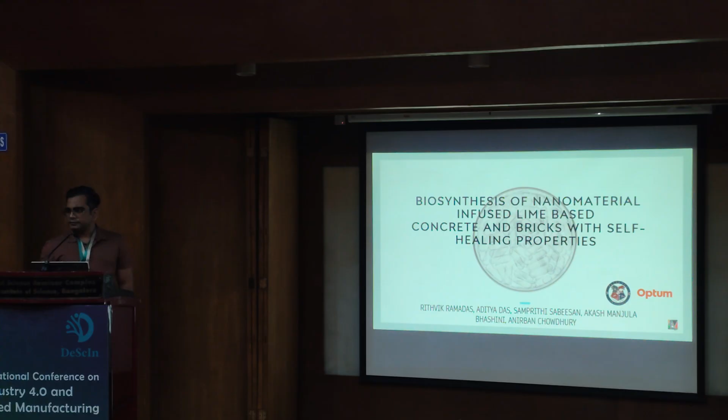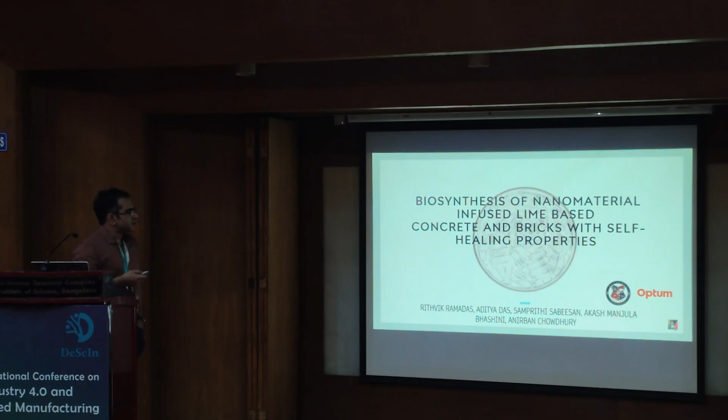So I'll try. A very good morning to one and all. My name is Rithvik. I'm a principal UX architect at Optum. And I'm also a visiting faculty at several places, including Alliance University. This is the work with my students there as well as my colleague there, Dr. Anirban Chowdhury. And the title of our research is Biosynthesis of Nanomaterial Infused Lime-Based Concrete and Bricks with Self-Healing Properties.

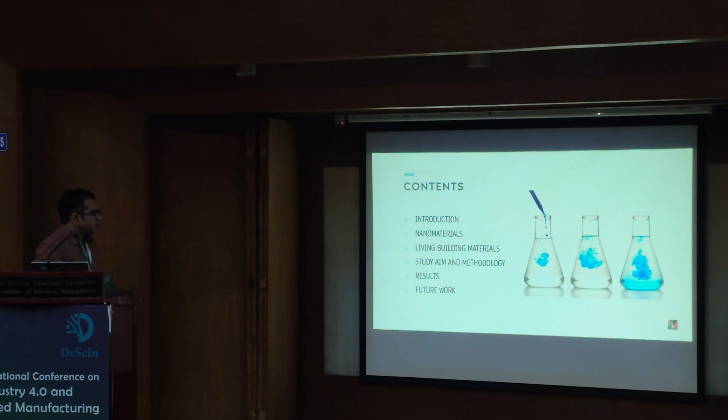This is the overview. We'll look at the introduction, we'll look at what is nanomaterials, we'll look at what is living building materials, what we try to do in this study, some results, and what we are trying to do in the future.

So nanomaterials have shown immense scope in improving properties and creating new kinds of materials, which are called metamaterials. What it does is, it changes the properties when you're assembling at a nano level. For example, there's the Ag9 silver nanocluster. Normal silver is non-magnetic, but the silver nanocluster becomes magnetic. So you have applications now in tagging cells using this nanocluster and extracting cells of interest. We'll look at other examples a little later.

In the right conditions, bacteria, viruses, and fungi are known to synthesize nanomaterials. Certain research papers consider bacteria, viruses, and fungi to be nanites or nanobots at that level. Although controlling them becomes a little difficult, we'll not cover that aspect in this paper. And buildings that are made with limestone are known to last a lifetime. Best example is the pyramids. They've hardly undergone much damage over the years except due to human interventions.

Roman concrete that incorporated limestone is known to heal itself. This was proven by researchers at MIT. And there are limestone microbes. So if you have gone to caves, you'll find structures that are known as stalactites and stalagmites. And there are species of bacteria and fungi and other microbes in it that help the growth of this by taking lime from the water that drips in the ceilings, as in calcium hydroxide that's present in the water in these places. And it also takes the carbon dioxide from the air.

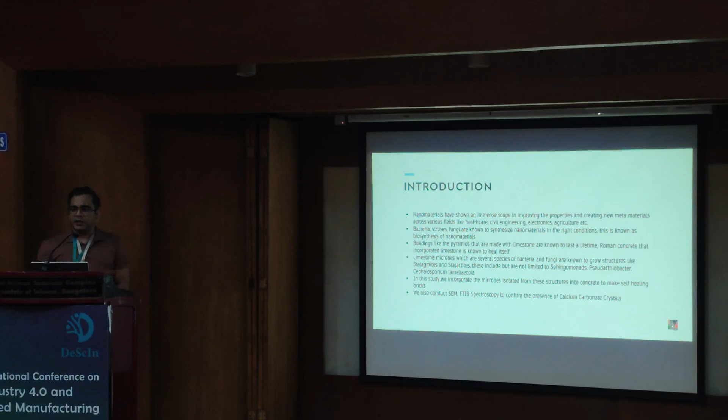We find similar structures in urban environments when accidentally sand from these places ends up in construction. So this bacteria ends up over here. In this study, we incorporated these sort of microbes into concrete and made it heal itself. We'll look at that. We also did scanning electron microscopy, FTIR, that is Fourier transform infrared spectroscopy, and X-ray diffraction to confirm the crystallization of calcium.

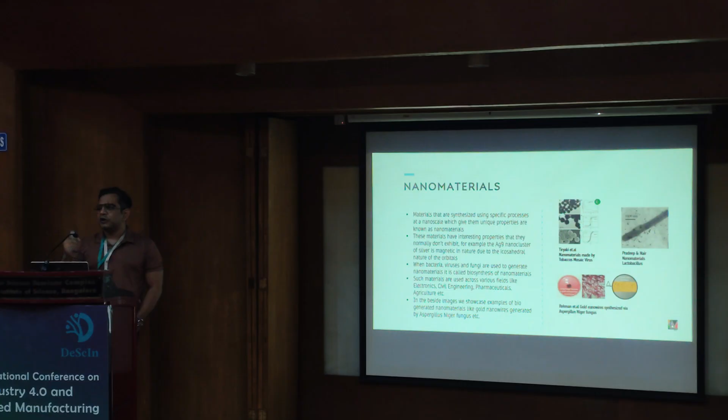You need to genetically modify them a little bit if you want to control their movements, or you can use something like an Ag9 nanocluster which has a peptide attached to it. Now, if you imagine that peptide is an antibody, it can attach itself to a virus or attach itself to a bacteria, and then you can control the movements using magnets. We'll not look at that in this research because that's not our aim.

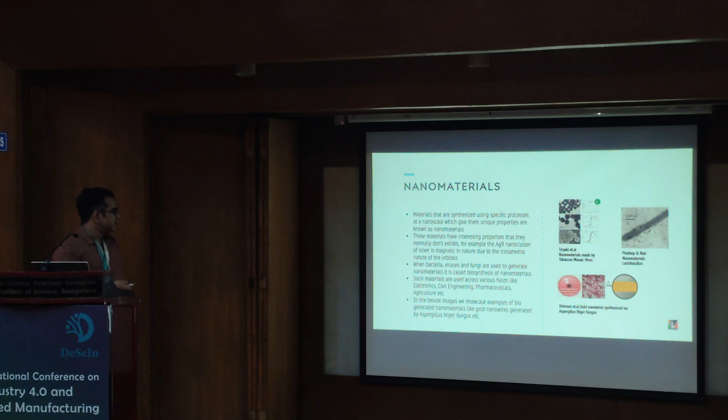What are living building materials? So when you incorporate such microbes into building materials, they're called living building materials. So there's bioconcrete that absorbs CO2, reduces greenhouse gas emissions. We have that as well, although this one's a little different from what we did. The Chettinad plaster, this was something done by the Chola dynasty. If you've seen the Ponniyin Selvan movie, it's the guys from that. They incorporated both limestone bacteria and curd, lactobacillus from curd. Now back then there was no microscopy or anything, it was just based on intuition.

The beauty of this is, in the curd, they mixed jaggery, plant material, other things, so that became the food for the curd bacteria. It used to generate CO2. The limestone bacteria's food is carbon dioxide, along with lime and other things. So this plaster became strong over time. And that is why you see these temples that were built by them are still extremely strong, whereas the Ejipura flyover keeps cracking.

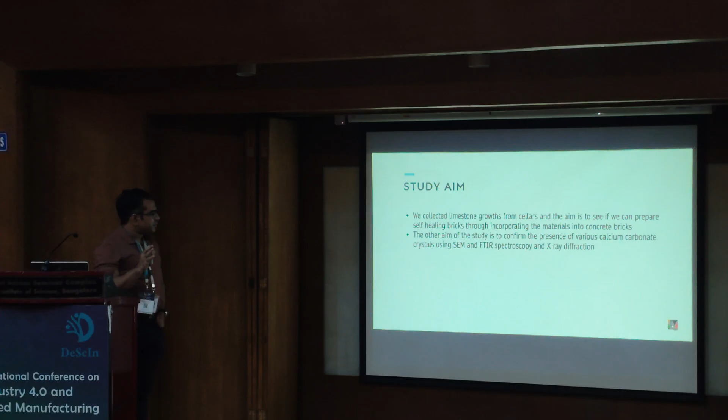Mycelium and rice husk has been known to make bricks that are durable and fireproof. This is by researchers in Australia. So what we did, we collected some limestone growths from cellars. We thought, let's see if we can make self-healing bricks, see what happens. And we wanted to confirm whether it is really crystallizing calcium carbonate.

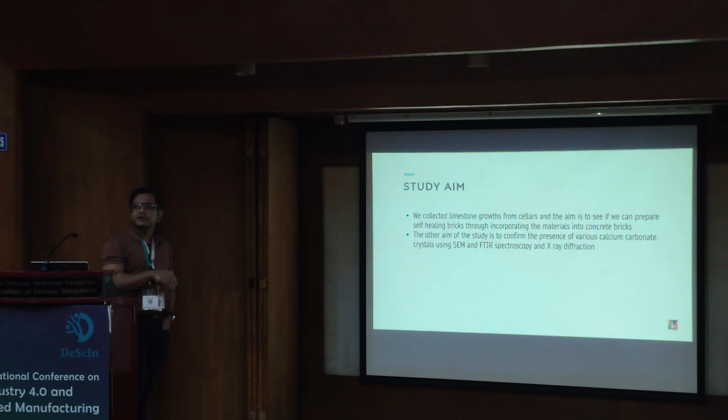So we did a variety of things: X-ray diffraction, Fourier transform infrared spectroscopy, and of course, scanning electron microscopy. So we went around. These are from some cellars in Bangalore where we found these limestone deposits, limestone growths. We put on some gloves, we used a hammer and chisel, carefully collected them, and we ground them carefully. And we created bricks with unique compositions.

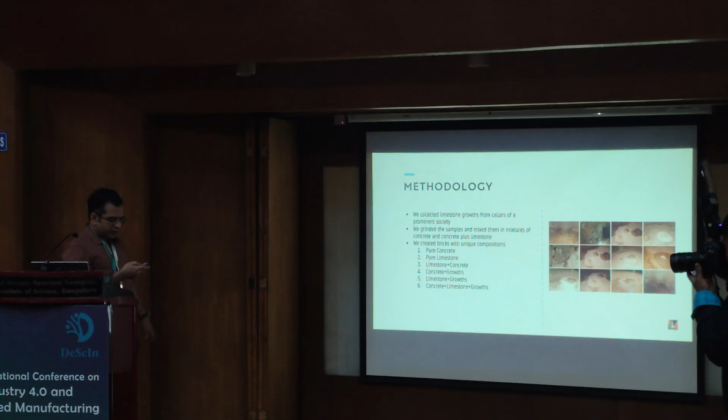So there was one with pure concrete that served as sort of a control one, and pure limestone, the second control one. The third control was limestone plus concrete. Then we created a brick with concrete plus this growth material, limestone plus this growth material, then concrete plus limestone plus growth. We wanted to see which brick would heal the best, which mixture. Of course, the first three wouldn't heal much because there's no limestone bacteria.

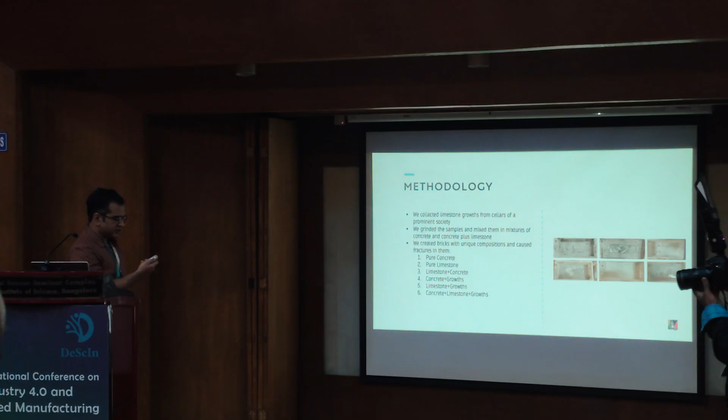Then what we did is we created fractures in them. These are the various bricks that you're seeing. Is there a pointer here? Okay. So these are the various bricks that are there.

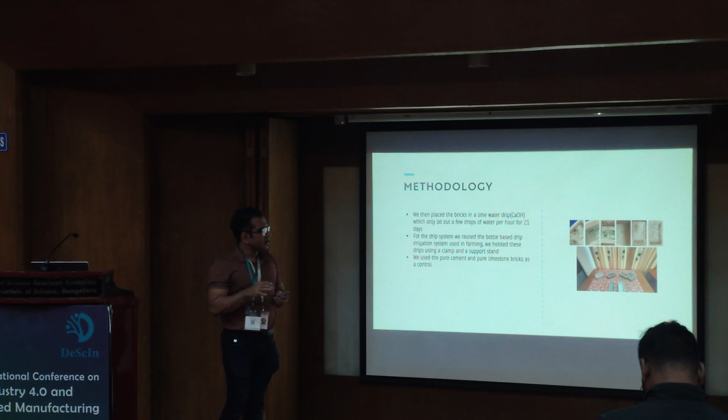It's okay. Then what we did was we placed these bricks in a lime water drip. So you can see this thing over here. This is the same thing that's used in drip irrigation. So water drops, a few drops for an hour. In 1 hour, you'll find like 5 to 6 drops of water. And that had calcium hydroxide infused in it.

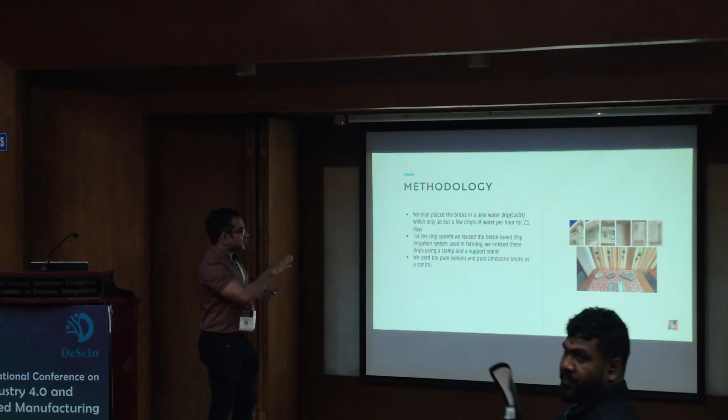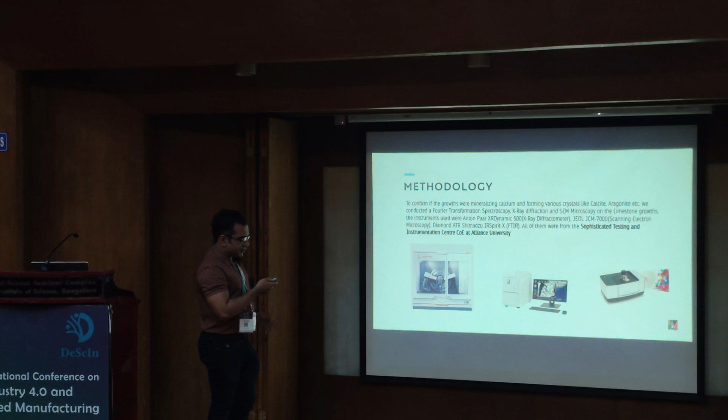And we put this setup in a room temperature of around 25 to 28 degrees centigrade. And people used to come and go in this room and the room around it. And we used pure cement and pure limestone bricks as the control group. And to confirm whether there was mineralizing, we used, as I said, these various instruments. These were all present from the Sophisticated Testing and Instrumentation Center, Alliance University. We thank them for helping us with this research and letting us use these equipments.

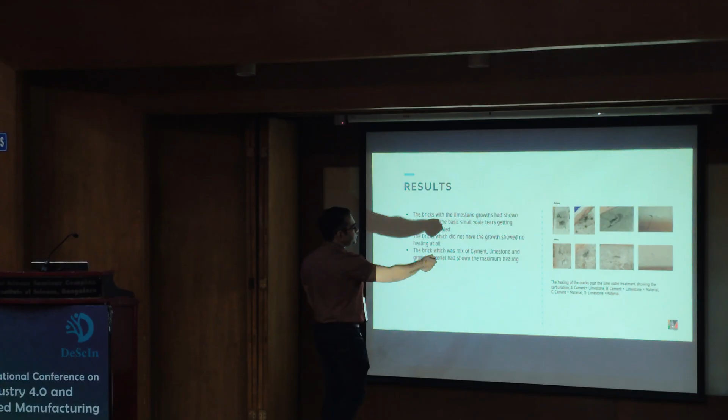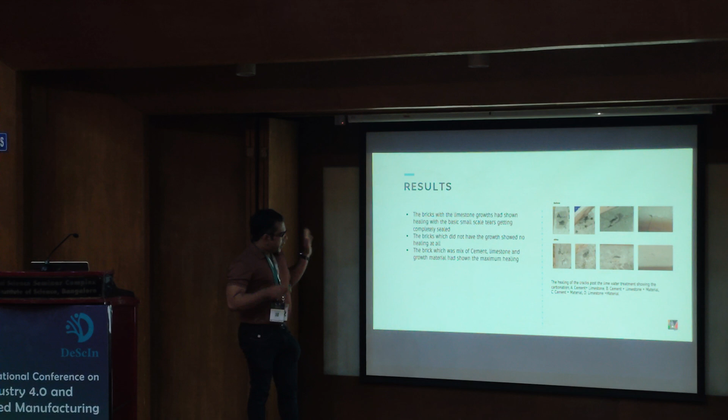What happened after a few days was, you can see the before and after effects. So you can see all these cracks, that's practically healed over here. I've placed some bricks, you can take a look at that. You can see the difference between the third one and the corresponding one below it. You can see such a huge fracture has completely become small. And similarly the one over here, all those small fractures that are there, practically gone. And the brick that worked the best was something that had incorporated both cement and limestone and the growth material.

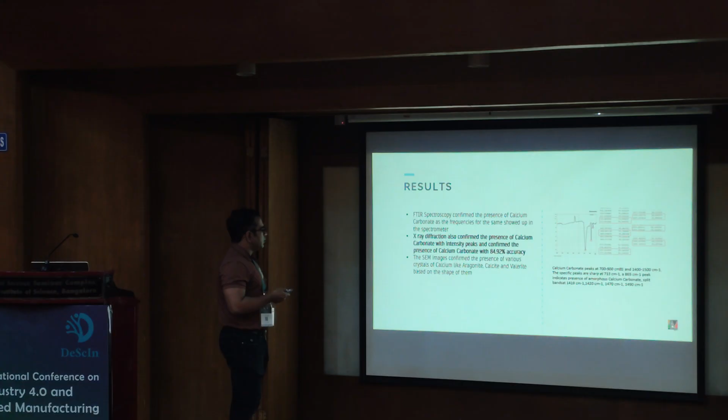FTIR spectroscopy confirmed the presence of calcium carbonate as the frequencies for the same showed up in the spectrometer, which is around 700 to 900 per centimeter, and we had specific sharp peaks at 713 and 865 per centimeter. So it indicates the presence of amorphous calcium carbonate at these: 1419, 1420, 1470, and another one at 1490. X-ray diffraction also confirmed the presence of calcium carbonate with around 84.92% accuracy.

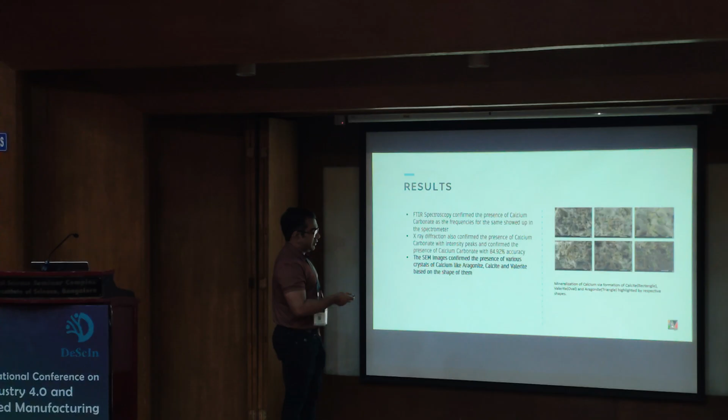Then we had the SEM images. Now this was the beauty of it. Mineralization of various forms, not just calcite. We were hoping that we'll just find calcite, but we found calcite, vaterite, and aragonite. So it's not just calcite crystals, it was crystallizing other forms of calcium carbonate at a nanoscale. That was the beauty of this.

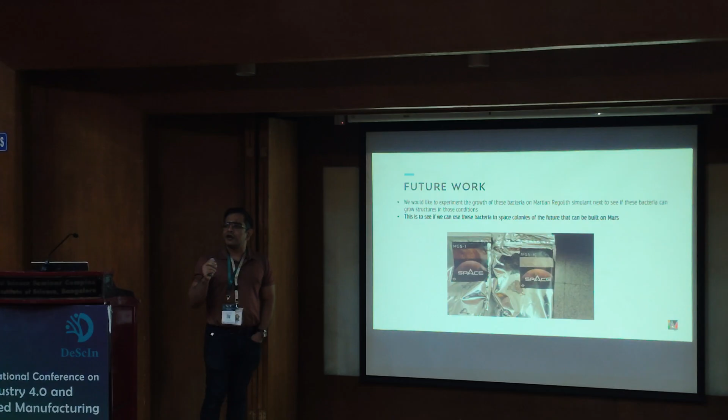Future work, we would like to experiment on the growth of this bacteria on Martian regolith simulant. So that's Martian soil, simulated Martian soil. It is sold by this company called Space, which is endorsed by NASA. So if we are building colonies on Mars in future, we'll have to ensure that any holes or any fractures that are found can heal themselves. The idea is to use limestone microbes and see if colonies can be built on Mars. Questions?

Oh no, that's the next one. Because limestone is very fragile. If you don't mix it properly, it can cause issues. Concrete is strong. But again, if you're not mixing it right, too much sand will make it brittle. Too little sand will also make it brittle. It's about getting the right composition.

So that is the next part. We want to see, okay, this can heal itself. It can absorb some CO2. But is it strong? And how do we improve the strength? We might want to take some inspiration from the guys in Australia where they added rice husk and other sorts of materials into this and see how we mix and match. So that's the next step, apart from the Martian simulant.

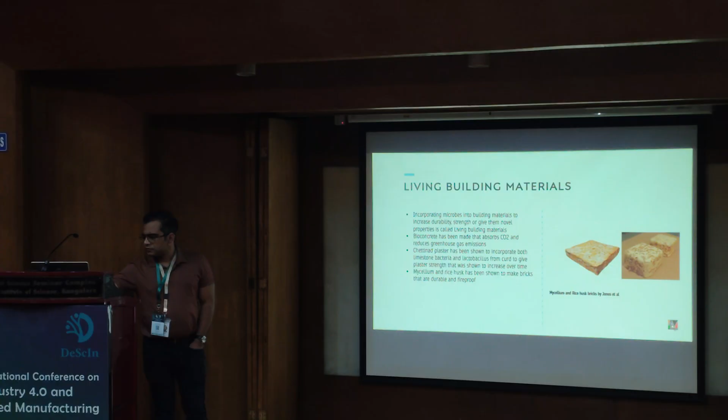Yes, I have one. Go to the previous slides, where you made certain mixes, right? Okay. So you consider pure concrete, pure limestone, and these are six components you consider, right? For the first two it's okay. For the next four, do you consider any volumetric ratios for this mix? I'm not able to recollect, but we followed the specifications that were there in the packaging.

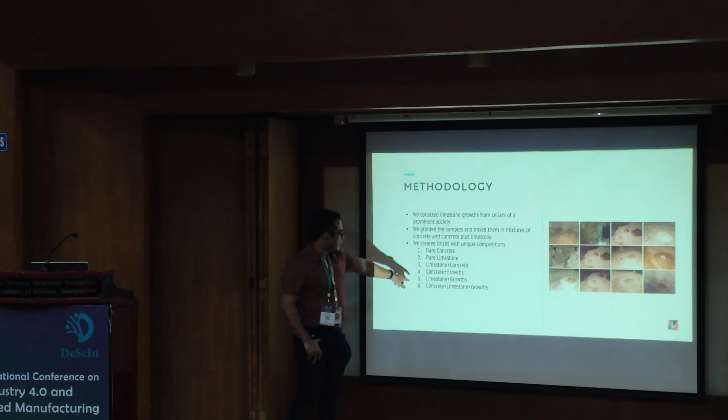Okay. Because the point is that if we change the volumetric ratios, because you are getting optimal values for the sixth one, right? So if you change these volumetric ratios, there may be some higher strength. So I think the growth was around 50 grams and concrete was around 150. The total weight was around 250 grams. You can check this here. Okay. No issues. Great.

But your point is right. Too much limestone or too much concrete will alter how it repairs itself, or it will alter the strength as well. That is something that we want to check in the next phase. Great. Thank you, sir.

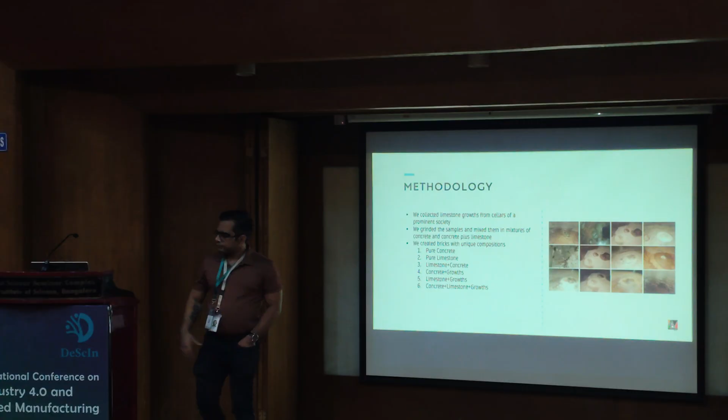Now I'm going to the next paper, Dr. Nitin Gaur, developing an integrated framework for physical and digital applications with the use of AI and advanced technologies for effective mass communication. So I'm going to leave this here. If others want to take a look, we can. Please use here.

Sure. That's it. No. You can note down the number. Optum doesn't hand out visiting cards. 6361 28 7376. That's Ramadas. From Kerala, born and brought up in Hyderabad, studied in Hyderabad.

Good morning. I'm Professor Nitin Gaur from Symbiosis Institute of Design. Our subject